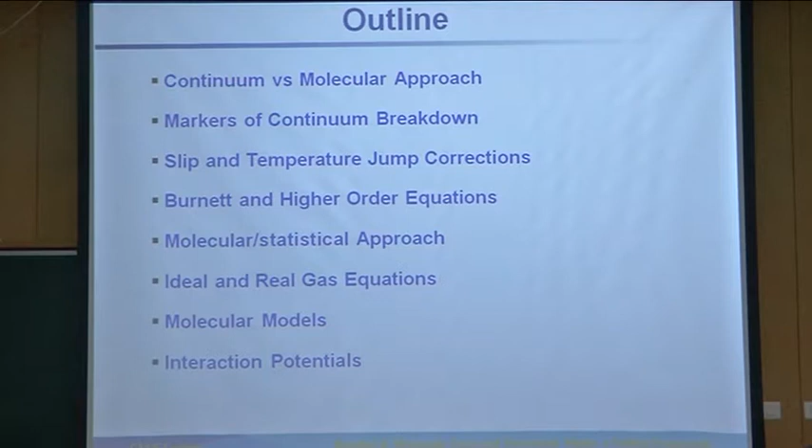As you know, a fluid can be described in two completely different ways, but still they are very complementary ways. Okay, so both methods are complementary.

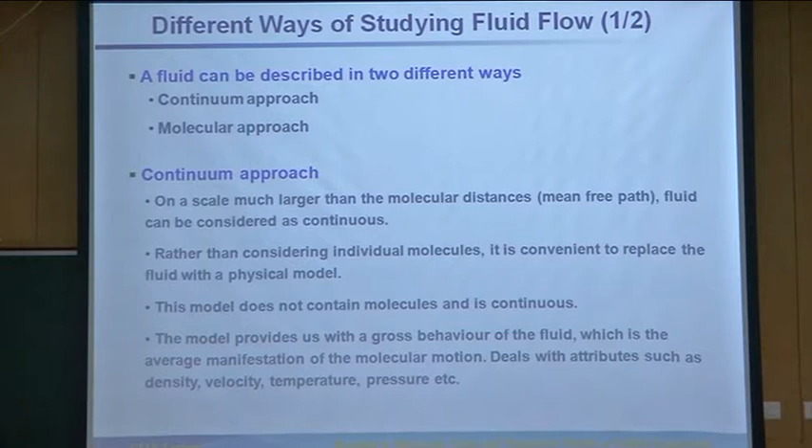When it comes to the continuum approach, the continuum hypothesis is that on a scale much larger than the molecular dimension, a fluid can be considered as a continuous medium. Of course, the reality is that gas is composed of molecules, particles, but you ignore that reality and consider it to be a continuous medium. You have a model for governing the variation of certain properties ascribed to this medium, such as pressure, temperature, velocities. You have a model that gives the spatio-temporal variation of these quantities, and these models are nothing but continuum models. One of those is the Navier-Stokes equation, based on the conservation of mass, momentum and energy, as told by Professor Myong.

On the other hand, the molecular approach is where you consider that fluid or gas is essentially made up of molecules. These molecules randomly move, and in doing so, they transfer mass, momentum and energy from one place to the other. Therefore, their behavior is governed by the laws of dynamics or kinetic theory.

When you consider these molecules, the number per unit volume is so large that you cannot practically deal with each and every molecule and its dynamics, meaning collisions with other molecules. So what you do is a statistical description of gas flows, meaning how many molecules possess this much velocity. This means you start talking in terms of the distribution function, the velocity distribution function, which is a fraction of molecules belonging to a particular velocity or energy level. Therefore the governing equation is the Boltzmann equation or a simplified model kinetic equation, one of those being the BGK equation.

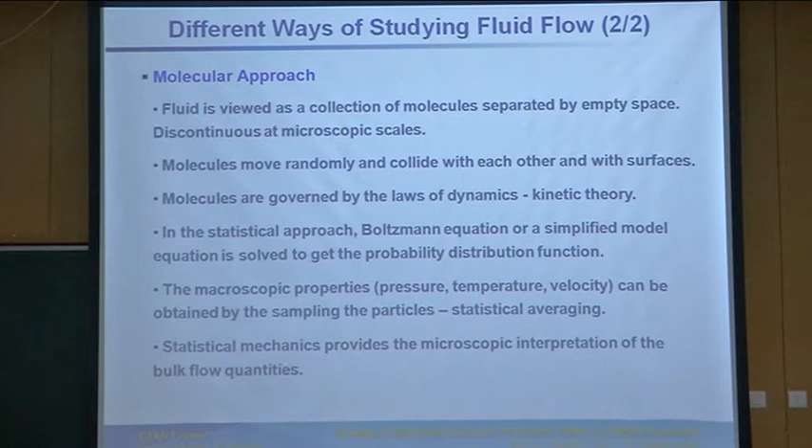But finally you have to come from the microscopic to the macroscopic picture, because you are interested in macroscopic properties, since you are measuring macroscopic properties. So you want to get back the macroscopic properties from the microscopic data. Either you sample the particles, or, as told by Professor Myong, from the statistical description you integrate those over the velocity space and you will get the macroscopic properties. Statistical mechanics provides the link between the microscopic description and the macroscopic description.

Having understood the two different ways of looking at fluid flow, there should be different methods of analyzing fluid flows. In fluid dynamics, we can have three different categories of methods. The first is the macroscopic method, based on the conservation laws. Here we talk in terms of Navier-Stokes equation based CFD, wherein you need the constitutive relations or constitutive laws—we'll talk about those in this course at a much deeper level. The length scale associated with the macroscopic method is of the order of 1 centimeter to 1 meter.

Then we consider the microscopic method, the bottom one. This is kind of a misnomer, because here the length scale isn't really in microns—it's actually in nanometers or angstroms. The method most popular here is molecular dynamics, an atomistic method wherein you consider the motion of molecules in physical space, and you integrate the equation of motion, the Newtonian equation of motion. That's how you get the overall description of the fluid flow when you integrate that picture.

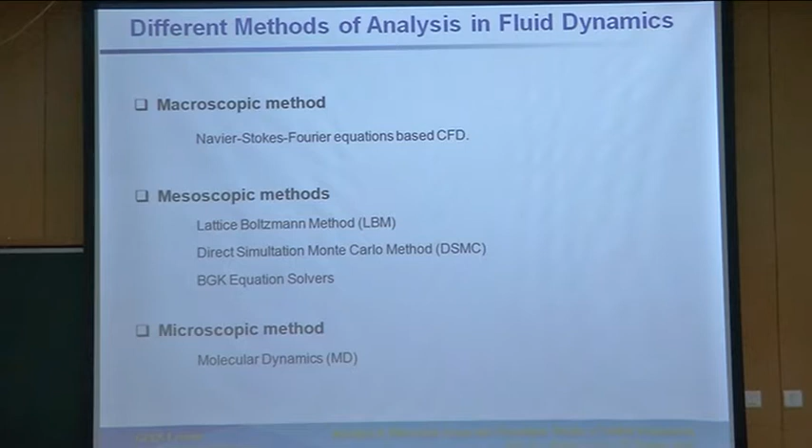Now, when it comes to the continuum versus the microscopic or molecular description of fluid flows, it's important to understand the continuum limit, and when and how we should use which model. So suppose you take the continuum model, the Navier-Stokes equation for example, you should be aware to what extent you can afford to use this equation, because it's a model with a finite range of applicability. As Professor Myong was telling, when it comes to continuum models, we deal with fluid particles. These fluid particles are in reality composed of molecules, but in the continuum model you do not consider this.

But if you consider a fluid particle, it must be composed of a large number of molecules, so that the statistical averaging would work.

If you compare this picture with this one, this red box, which consists of a few molecules, of course it's a representative picture. Consider that you have a very small fluid particle, so that the number of molecules in this fluid particle is very small. So would you be able to do the statistical averaging? No, right? Because it would fail beyond a certain extent, as you will not be able to capture the signal, and the statistical fluctuations will be so large.

So now, under what conditions could statistical averaging fail? Primarily, suppose you have a very small length scale, for example your characteristic length scale is very small. You are dealing with microfluidics or nanofluidics, with micro or nano channels. So at the nano length scale, you'll have very few molecules, and your statistical averaging may not be really right.

Another condition is as you go higher up in altitude, beyond a certain altitude the number of molecules per unit volume is so low that again the statistical averaging would start failing. So there are two scenarios in which we have to think of looking beyond the continuum description of fluid flows, or making corrections to the continuum model.

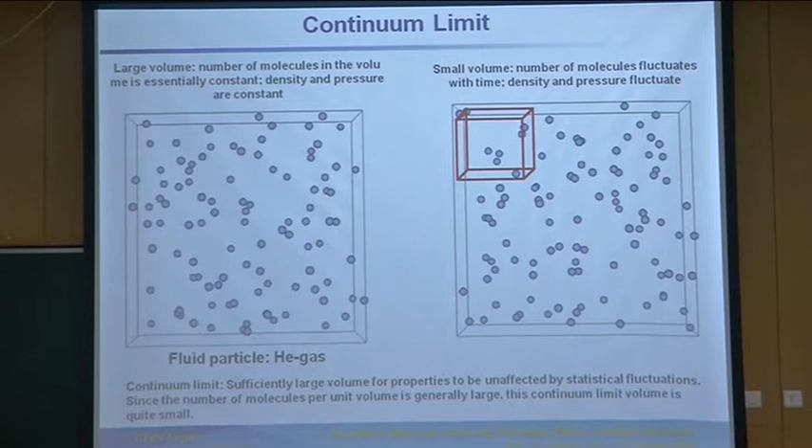Now viscosity is an interesting property. It's a transport property, which, of course, for a fluid, you know a fluid deforms under any amount of shear stress, but it presents resistance to being deformed. This viscosity is a property that represents the magnitude of a fluid's resistance to the deformation rate. Essentially it's a transport property associated with momentum transfer.

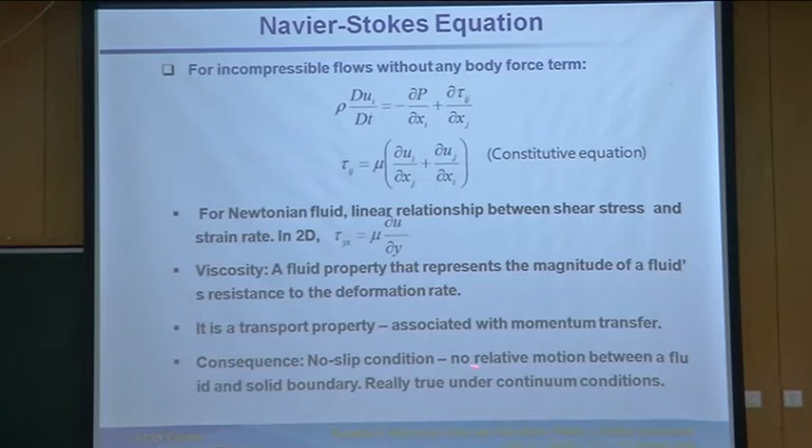And one consequence of this property is the no-slip condition that we have been using in CFD quite a bit, which means there is no relative motion between a fluid and a solid boundary. Whether this is really true under all conditions?

No, it's not. If you look at the dynamic viscosity more closely from the microscopic perspective, and use the basic laws of statistical mechanics, you consider the molecular picture: the molecules in the fluid domain and the random motion of molecules from one region to another. Due to this random motion, momentum gets transferred in the direction of the flow, from the higher velocity region to the lower velocity region.

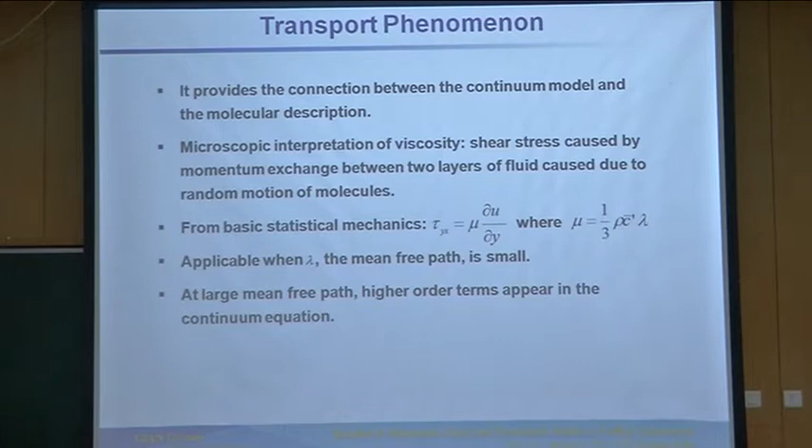That's how you get the same relationship between shear stress and strain rate from basic statistical mechanics. If you apply this, you'll find that mu, the dynamic viscosity, is defined as one-third rho times c-bar, where c-bar is the mean thermal speed, equal to the square root of 8RT over pi, where R is the specific gas constant.

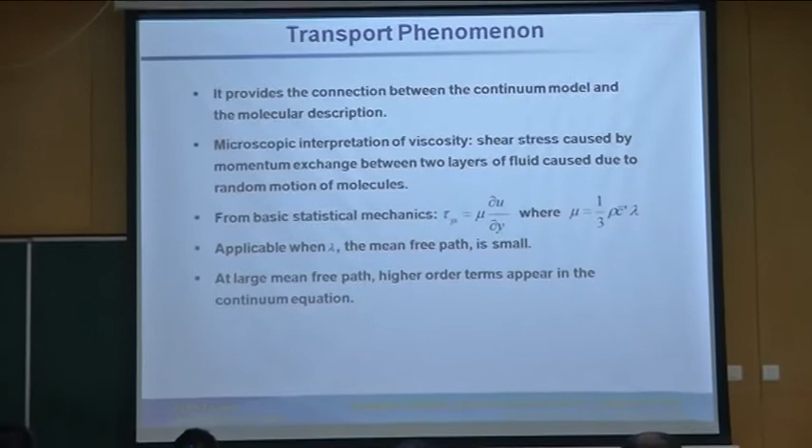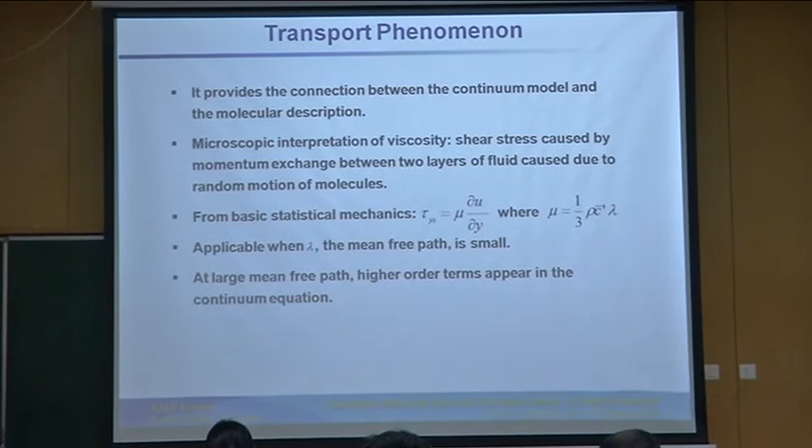If we look in more detail, this expression is only true when the mean free path is very small. The mean free path is the average distance between two successive collisions of a molecule. If it is large, this expression is no longer valid, and you get higher order terms, making the relationship between shear stress and strain rate more complicated. So at large mean free path, or at high altitudes, these higher order terms should appear in the continuum equation, and you need to consider modifying the linear constitutive relationship.

The same is also true for viscoelastic fluids.

Now, when is the continuum hypothesis valid? This brings us to the idea behind the Knudsen number, which will be consistent with what Professor Myung said. Initially, the Knudsen number was proposed as an indicator of non-equilibrium. It is the ratio of the molecular dimension, most often the mean free path, to a characteristic length d. We'll discuss what this characteristic length scale should be, since it's not straightforward — it depends on the individual problem.

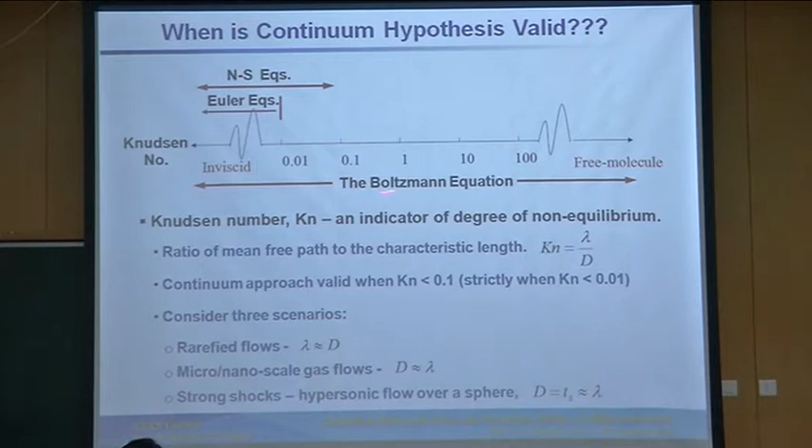Based on this, to describe the validity of the continuum hypothesis, we plot the Knudsen number on the x-axis and show the validity of different models. The Navier-Stokes equations are typically valid till a Knudsen number of about 0.1, and with velocity slip and temperature jump corrections to the boundary conditions, the model works till a Knudsen number of approximately 1. The Boltzmann equation, however, has a wide range of applicability. In fact, as we'll see later, the Navier-Stokes equations, or any macroscopic conservation equations, can be obtained from the Boltzmann equation by the method of moments.

Based on this, we could have three scenarios. One is rarefied flows, where you need to consider the Boltzmann equation, going beyond the Navier-Stokes model. In rarefied flows, the mean free path is of the order of d, the characteristic length scale, meaning the Knudsen number is large.

The second scenario is micro/nanoscale gas flows, where the characteristic length d, the global length scale, could be of the order of the mean free path — again making the Knudsen number large. The third is strong shocks, such as hypersonic flow over a sphere, where the length scale is the shock thickness. If you want to resolve the shock structure, this length scale is of the order of the mean free path, and again you need to consider the molecular description of fluid flows.

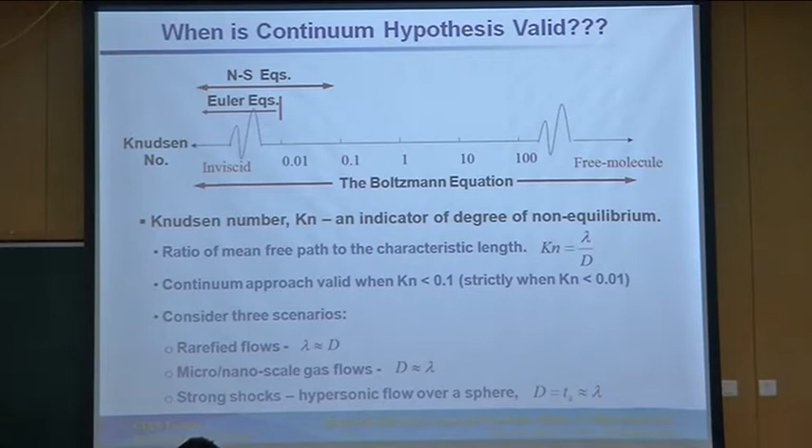Based on this, we describe the different flow regimes. As long as the Knudsen number is less than about 0.01, it's considered continuum. From 0.01 to 0.1, and a little beyond, it's slip flow. Traditionally, transitional flow is from 0.1 to 10, and beyond 10, in terms of Knudsen number, it's free molecular flow.

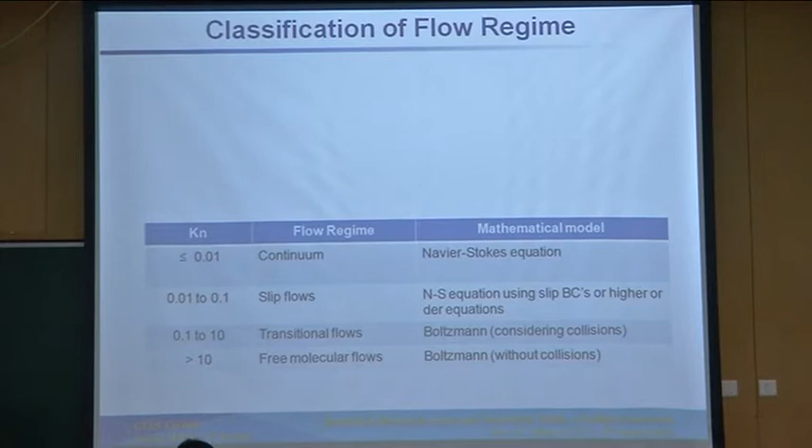Now, when it comes to slip flows, the Navier-Stokes equation can still be used, because the Knudsen number is still very low, but with corrections to your boundary conditions. So what are these corrections?

You will find that as Knudsen number gets larger, the no-slip condition on the surface is no longer valid, and you have to implement the slip condition, such that there is some finite relative motion between the gas and the surface. These corrections were first given by Maxwell.

Lambda is the mean free path, and du over dy at y0 is the velocity gradient on the surface. At ordinary conditions, your lambda is very small, less than micrometers, so the velocity slip will be very small. You can afford to neglect it.

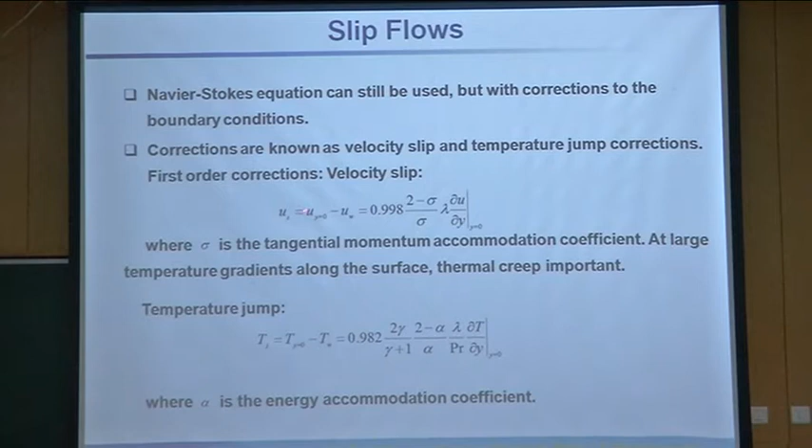But as you go to higher altitudes, your mean free path would be larger, so this term could become important, and the same has to be implemented in the boundary conditions. Using this simplified first order model, you can have second order models and so on. Professor Myong has worked on that as well, and there is something called the Langmuir slip model, which considers the adsorption of gases on the surface.

But if you consider micro and nanoscale flows, even at terrestrial conditions where you have very low lambda, you can have very high velocity gradients because of the small length scale. So this term could be effective even at micro and nanoscales, by virtue of the last term, du over dy, the velocity gradient on the surface.

Similarly, we could have a temperature jump on the surface, as the temperature of the gases may not be same as the temperature of the surface under rarefied conditions. Again, a similar expression applies, where alpha is the energy accommodation coefficient, describing how well the gas is getting accommodated with the surface in terms of energy.

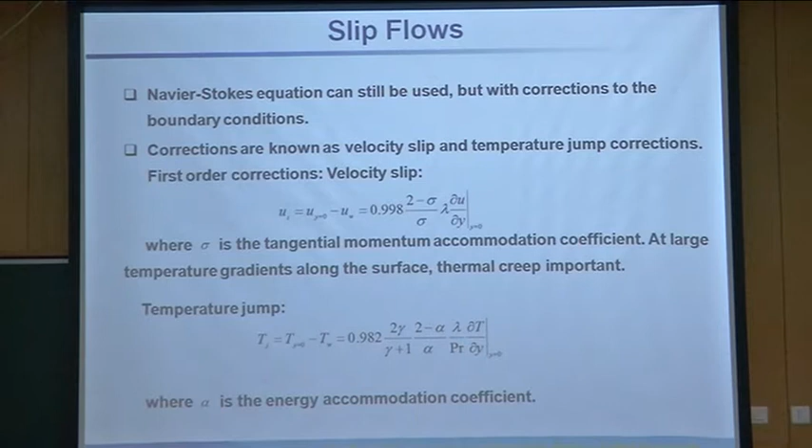Now, when you go to a little higher Knudsen number, Professor Myong was showing the Chapman-Enskog expansion, where you make corrections assuming your system is in equilibrium and then perturb it out of equilibrium. You have to consider some added terms to the distribution functions that define the equilibrium state. Depending on the number of terms you add, you can have different continuum models.

For example, if you consider second order corrections, you get the Navier-Stokes equation. The third order gives you the Burnett equation, so you could have higher order viscous and flux terms. Here I am showing the viscous term for the Burnett equation.

Interestingly, if you compare the leading term of the Burnett equation to the viscous term in the Navier-Stokes equation, the ratio is nothing but the Mach number times the Knudsen number, which is consistent with what Professor Myong has been saying: that it's not only the Knudsen number that matters, but the product of Mach number and Knudsen number which needs to be considered.

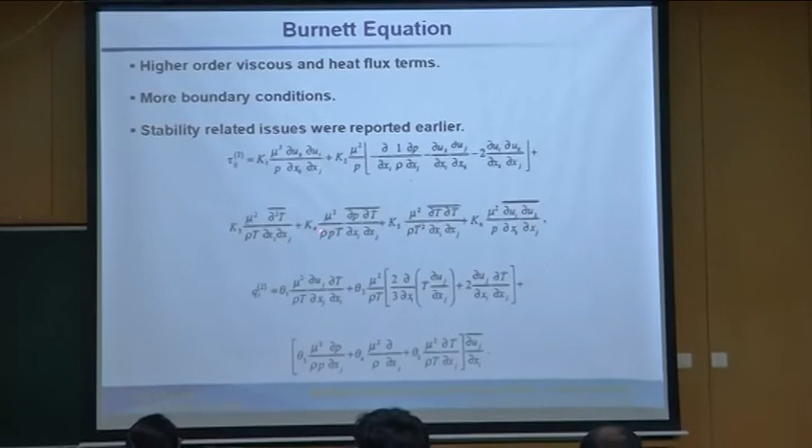The other condition in which the Burnett equation needs to be considered is when you have low speed but highly non-isothermal flows. Suppose you have large temperature gradients along the surface. In that case, these terms could be large. So then you need to consider the Burnett thermal stress.

Now, if you go further in terms of the degree of non-equilibrium, which is given in terms of Mach number times Knudsen number, the product of those, then we need to consider the molecular description of gas flows. So let us now consider the molecular description of gas flows. Let us start with the definition of a gas, and how it is different from solid and liquid.

Of course, the three states of matter can be distinguished because of the intermolecular forces, or in terms of the mean molecular spacing that exists between the molecules. So, intermolecular forces and of course the shape and the volume.

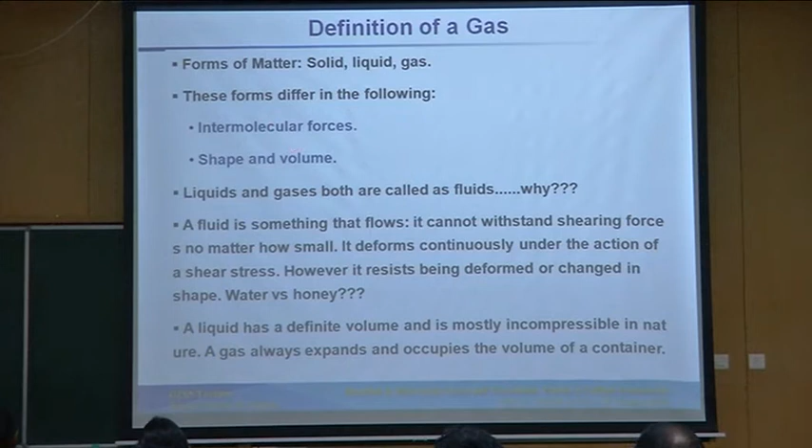Now, when you consider a gas, so typically an ideal gas, as you know from your high school physics, an ideal gas is something for which the intermolecular forces can be neglected, or molecules do not interact until and unless they collide with each other. So that is how you define an ideal gas.

Now, under what conditions is it true, and how do we consider the departure of a gas from the ideal state, and what are the effects of temperature on the model that we consider in describing a molecule or a gas. So then, what is a molecule? The molecule is something that characterizes the substance or the gas itself. It is the most basic, elementary entity that describes the properties of a gas.

Now you can have three kinds of gases. You can have monoatomic gases, diatomic gases, and polyatomic gases. Now a monoatomic species has only translational motion. It can only move in the space, in the physical space, in three independent directions, x, y, z.

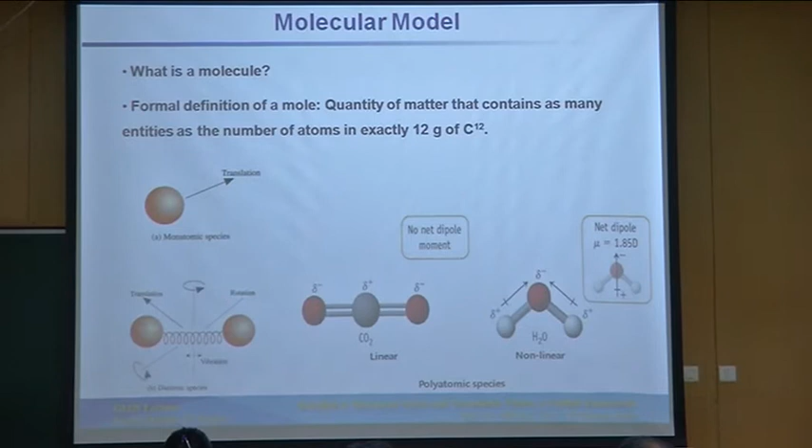When it comes to diatomic species, it can not only move, but these can also rotate about the axis. So accordingly, you will have the rotational mode becoming active when you consider diatomic gases. At the same time, if you consider this basic spring model, this molecule can also vibrate. So you will accordingly have the active vibrational mode. Same is true for polyatomic species.

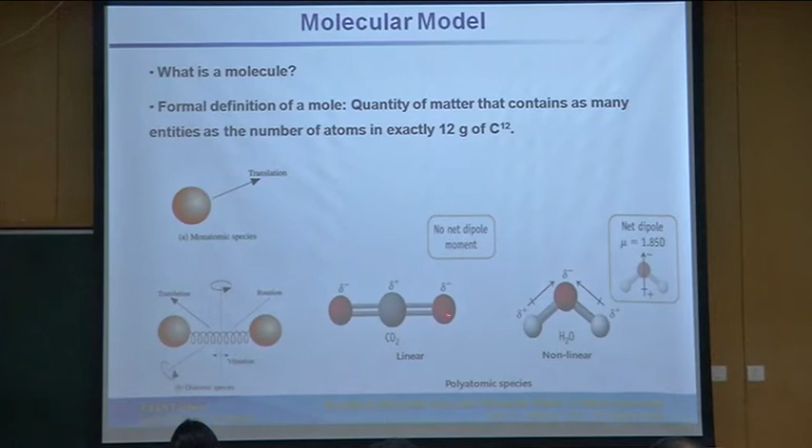You can have two different kinds of polyatomic species, linear and non-linear. Linear, for example, CO2 is a linear polyatomic molecule. Polyatomic means it should have three or more atoms. When it is linear, again, it depends how many degrees of freedom would be active for each mode. For example, translational, there could be 3 degrees of freedom active.

When it comes to rotational, for the diatomic and the linear polyatomic, you will find that there will be only 2 rotational degrees of freedom effectively. It's because the moment of inertia about this axis would be very small. Now, you will have the moment of inertia about this axis and the z axis, but the moment of inertia about this axis is very small, so ignore that degree of freedom. So effectively you have 2 rotational degrees of freedom here, whereas for non-linear you have 3 rotational degrees of freedom.

When it comes to the vibrational degrees of freedom, it becomes a little complicated because it is temperature dependent. Depending on the temperature, you can have different active vibrational degrees of freedom. At low temperature, the active vibrational degrees of freedom could be as low as 0, whereas at a temperature close to the dissociation temperature of the gas, you will have the most excited state of the vibrational mode. So it depends on the individual gas. And therefore, when we consider the molecular description of a gas, or when we develop a molecular model, these things need to be considered.

How do you describe a gas? How do you consider the basic molecule description? It all depends on the details. Here in this picture, we are completely ignoring the electronic structure.

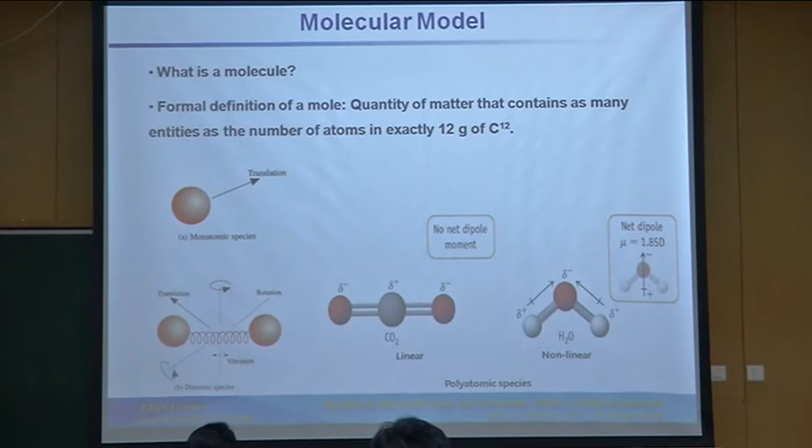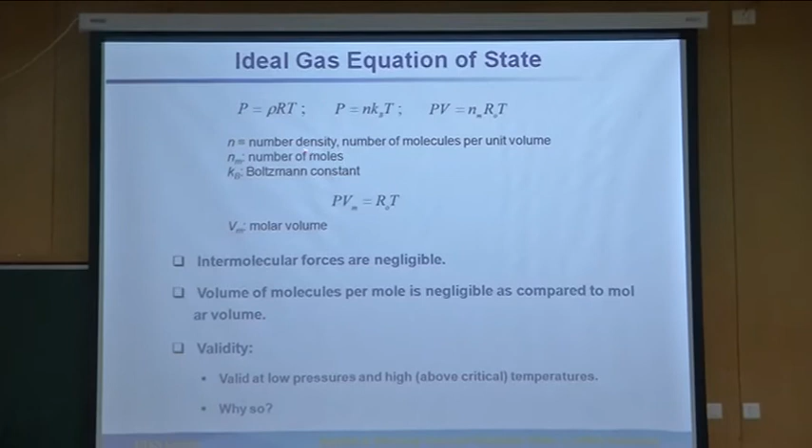Let us consider the ideal gas equation of state, given in different forms. Let us be aware of the different terms used in this course. P equals rho RT is the most known form, where rho is the density, mass density, R is the specific gas constant, T is the temperature.

It could be written in this form, N kT, where N is number density, the number of molecules per unit volume, and kB is the Boltzmann constant. You can also write the same equation in this form, where N sub M is the number of moles, and R0 is the universal gas constant.

If you bring the number of moles in the denominator on the left hand side, the form you get is PVm equals R0T, and why we are interested in this form will become clear soon, where Vm is the molar volume of the gas per unit mole.

Now, when it comes to ideal gas, we consider that the intermolecular forces are negligible. At the same time, we say that the volume of molecules per mole is negligible as compared to the molar volume - one is the macroscopic volume, and the other is the total integrated microscopic volume comprising the molecules.

But how about the validity of this equation? Whenever we use an equation, you should be concerned about its validity. The ideal gas equation of state in this form is valid at low pressures and high temperatures. Why so? Think about it a little and then come back to me. But let us remember this: valid at low pressure and high temperature.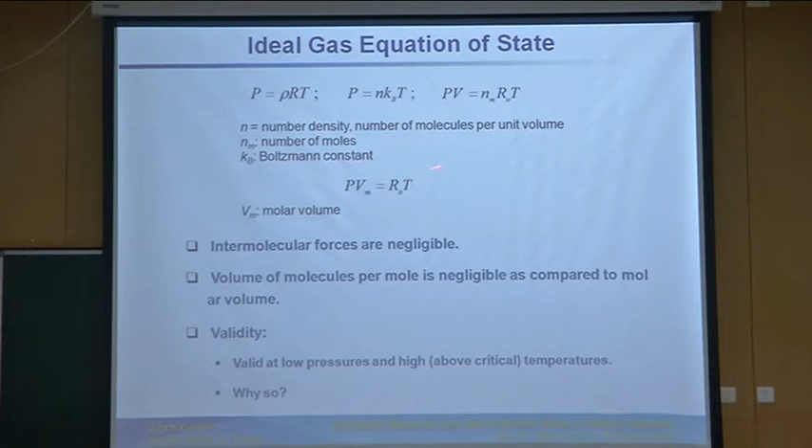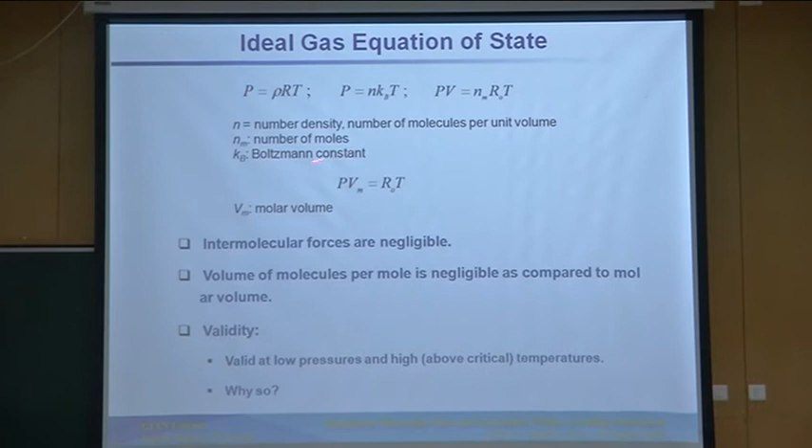So that is the idea behind real gas effects - real gas means you have the opposite conditions of high pressure and low temperature. For example, at cryogenic temperatures, you will need a different equation of state or a modification to this equation. Or when you have high pressure, the number of molecules per unit volume is so large that intermolecular forces cannot be considered negligible. Again, you need a correction for that.

So the two corrections we will consider in this lecture are the van der Waals equation of state: P plus A over Vm squared, times Vm minus B, equals R0T. That's why we use that PVm equals R0T form of the ideal gas equation. Here, A over Vm squared is the correction for the intermolecular forces significant at high pressure, and B is the correction for the finite volume of the molecules as compared to that of the gas.

Interestingly, these parameters A and B can be obtained from the critical properties of a specific gas, and you can write this equation in terms of reduced quantities, normalized by these critical properties. You then have the universal van der Waals equation of state, which you can apply generally. The other equation is the Virial equation, given by this, wherein you write PVm over R0T.

The left hand side is also known as the compressibility factor, which is written in terms of this kind of expansion, expansion in terms of the molar volume. A1 and A2 are the coefficients which are known as the virial coefficients. Vm is the molar volume.

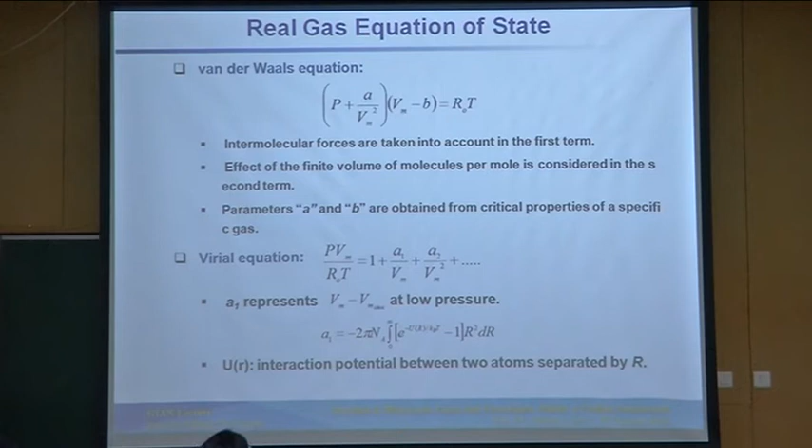So therefore, let us now consider this interaction potential, how molecules do interact with each other. Of course, you can have many more equations of state, but here we are considering only two.

So having understood that, we started with the assumption that beyond some point, when some conditions are violated, we need to consider the molecular description of gas flows. In the molecular description, you need to construct the molecular model, how good or bad you can design it, because you have limited computational capabilities. So you need to know the computational capabilities you have, and accordingly consider an appropriate molecular model. After choosing the molecular model, you need to consider how these molecules are going to interact with each other. This is very important in the molecular description of fluids or gas flows.

Herein, let us consider one popular interaction potential. It's a model potential. Why model? Because the way two molecules interact with each other is truly very complicated, it could be highly complicated. And how can you describe the true interaction between two molecules? This is again a very complicated subject.

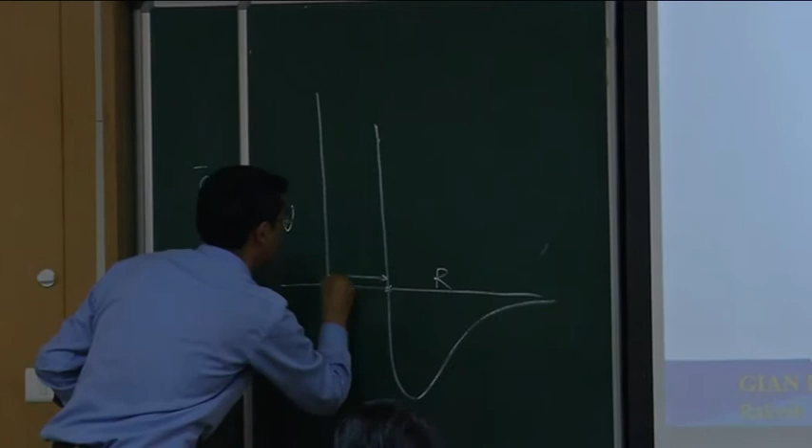Now this distance, or this location, is very important, where you are getting the interaction potential at zero. I forgot to show here—this is your U and this is your R, so the behavior is something like this.

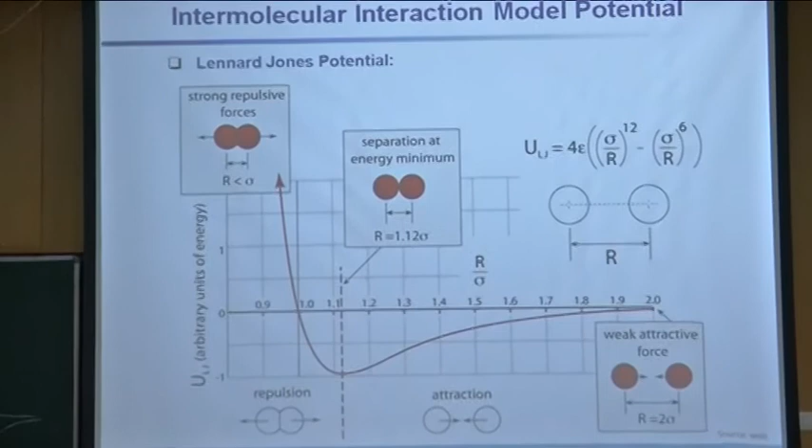This location, this distance, is nothing but sigma. The importance of sigma is that it's a very important parameter because it represents the length scale at which the interaction between the molecules becomes very significant—they start repelling each other strongly, as you see here it goes repulsive. There is a very strong force in repulsion, so molecules are strongly repelled at this length scale. So this is a very important length scale.

In fact, you can use it to describe the diameter of a molecule, because there is a length scale at which the molecules really start repelling each other and the two molecules would simply go away. So it can be used to describe the diameter of a molecule, because otherwise it's easy to say the diameter of a molecule is 3 angstrom, but if you really think about it, it's very difficult to define the diameter of a molecule. So this is one such measure which defines that.

Now, yeah. What was that? The significance of positive and negative value.

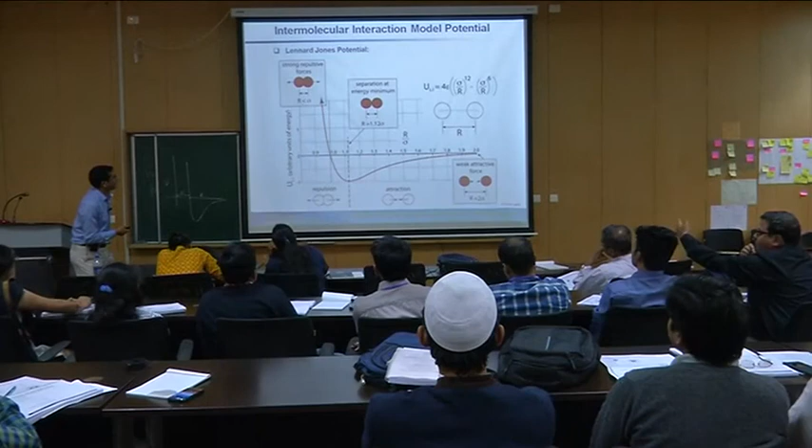You have this attraction force, and then the repulsion starts. But this is the net effect of that—you have the attraction and the repulsion. Beyond this, it's the repulsive part which becomes prominent, because of this relationship.

The second term on the right hand side gives the attraction, and the first term on the right hand side gives the repulsion. So accordingly the combination would give you a value. I forgot to mention this: sigma over r to the power 6 is the attraction term, and sigma over r to the power 12 is the repulsion term.

Interestingly, why it is sigma over r to the power 12 is that it has been chosen such that it approximates this behavior really well. At the same time, you can save computational time, because sigma over r to the power 12 is nothing but the square of the right hand side term, sigma over r to the power 6.

So therefore, when it comes to the molecular description of gas flows, the model that you choose is not just based on how well it can capture the physics, but also based on the limited computational resources that you have. So sometimes you have to make a trade-off between accuracy and numerical efficiency. Sometimes you would like to go for a very sophisticated, advanced model, but you do not have resources to really do the computations.

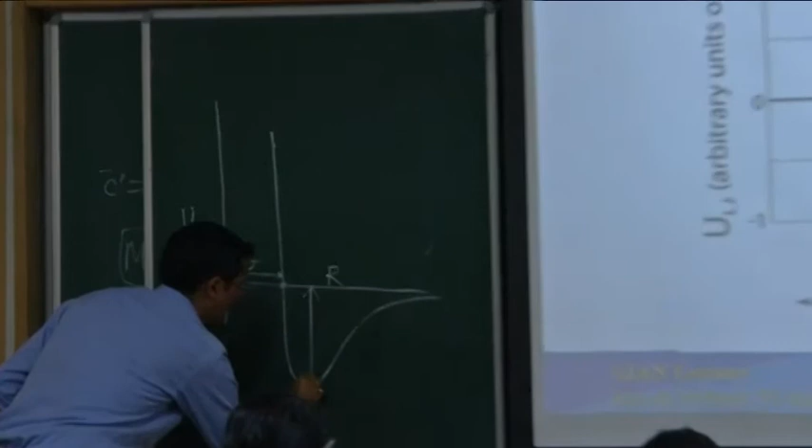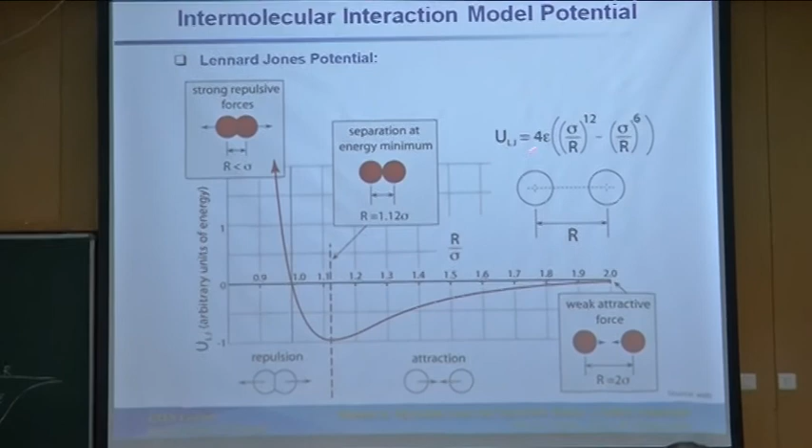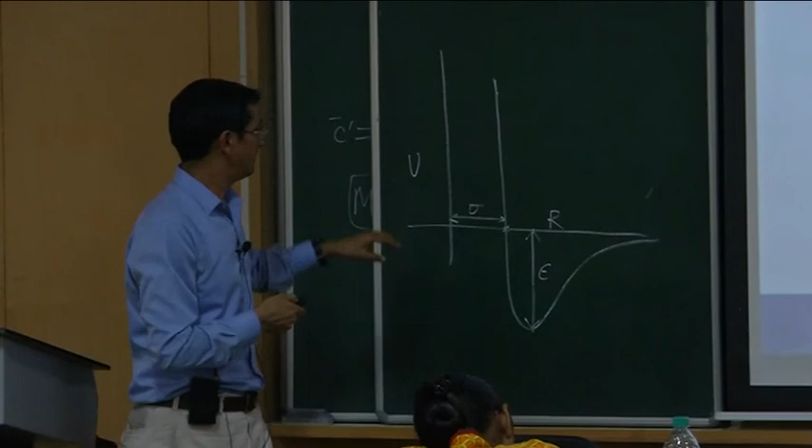Now this depth here is known as the energy well depth, and it is given by the symbol epsilon—that's how epsilon comes in here. It represents the energy well depth. Again, how well you are able to represent the interaction between the two molecules is given by these parameters, sigma and epsilon, in this particular model, the Lennard-Jones model.

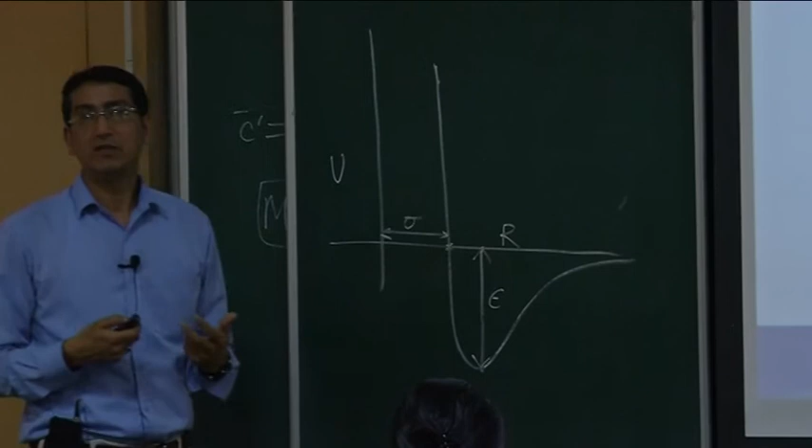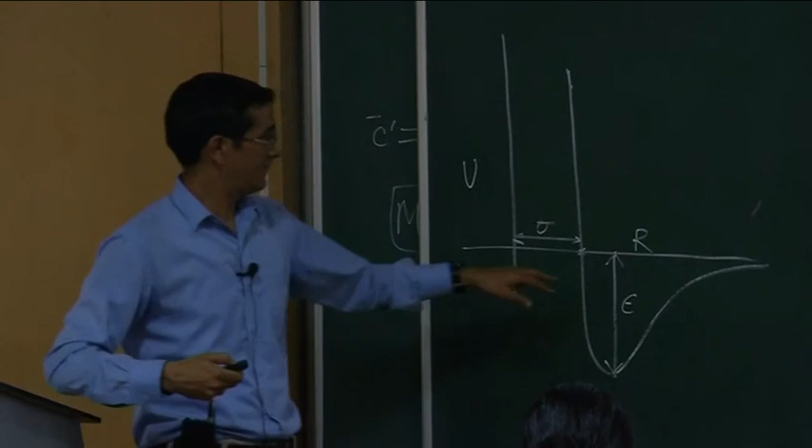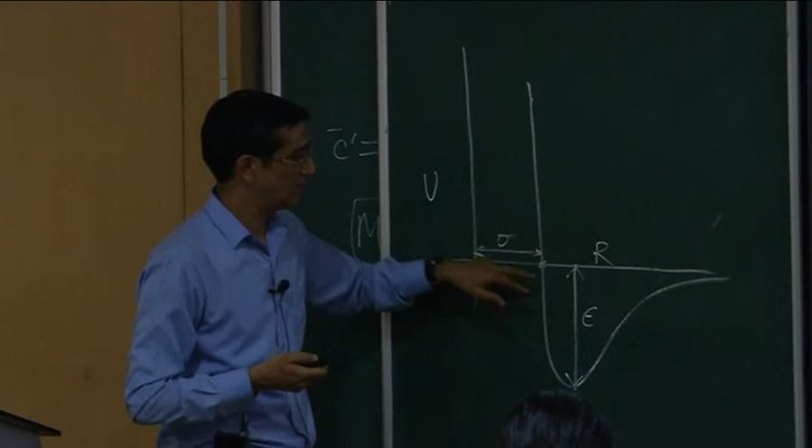Depending on the epsilon value and the sigma value, you should be able to see the qualitative behavior of different gases—whether you are able to reproduce the behavior of gas at the qualitative level and then at the quantitative level. For example, if you consider different gases like oxygen, nitrogen, and helium, whether this model can really give you the correct boiling point, it would depend on the values that you choose for sigma and epsilon in this model, the Lennard-Jones model.

Please understand that it is mentioned beyond r equals 2 sigma, or 2.5 sigma many times taken—beyond that distance, we consider that the forces between the two neutral molecules have become weak. Again, it would depend on the kind of molecules you are dealing with. If they are neutral, the forces acting between them are because of temporary dipoles, and these dipoles are transient in nature. As the molecules pass by and become distant, these temporary dipoles would go away.

But again, if you have a polar molecule interacting with a neutral gas molecule, or a polar molecule interacting with another polar molecule, then you will have a different kind of potential existing between the two molecules. So again, it would depend on the molecule to molecule how you choose this potential.

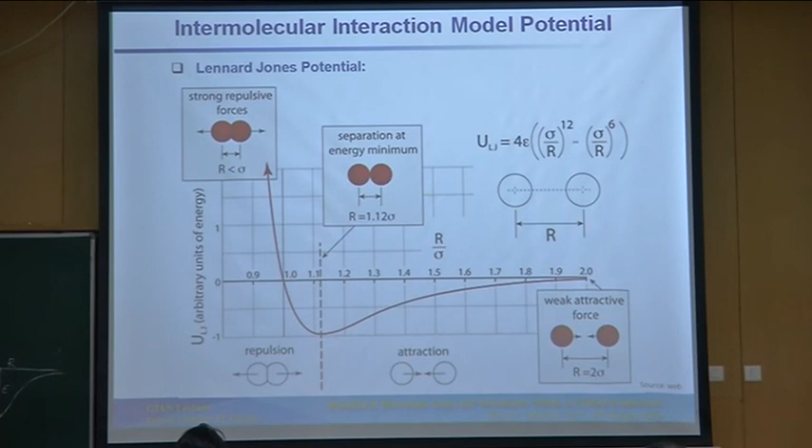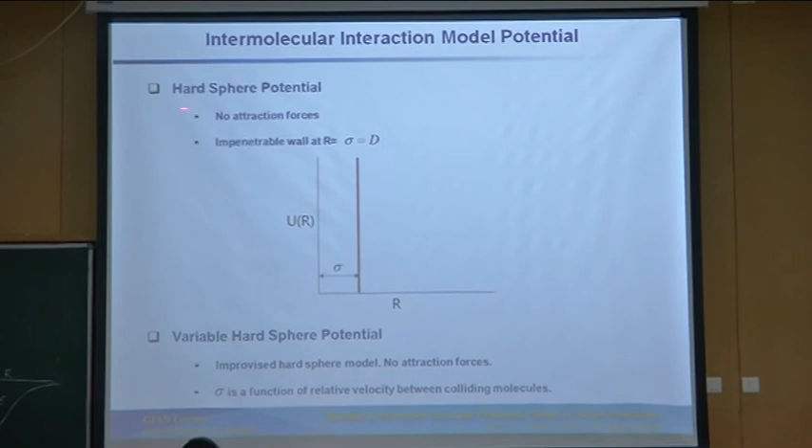Let me describe two simple potentials that we typically use in direct simulation Monte Carlo method. The first one, the simplest potential, is the hard-sphere potential, also known as billiard ball potential. It's again a model potential in which the attraction forces are completely ignored.

The two molecules approach each other and interact only when they physically touch. When they do so, they completely repel each other. They cannot cause any deformation because the forces between the two molecules are so large that they immediately bounce off each other. That's the idea behind the hard-sphere potential, an impenetrable wall at the junction of the two molecules.

So it's not a soft sphere potential, please understand. That is why it is called a hard sphere potential. When you consider a soft sphere potential, which you need for example if dealing with grains or sand, you also need to consider the deformation of the molecules. Here it is hard sphere, or billiard ball.

Now why do you choose a potential as simple as this, in which molecules do not interact until they really collide, at which point they simply bounce off each other? It's again guided primarily by computational resources. You want to save resources, but still, from numerical experiments, you have to do verification of the model and then validation with respect to experimental data, to check whether it reproduces the qualitative behavior and then the quantitative.

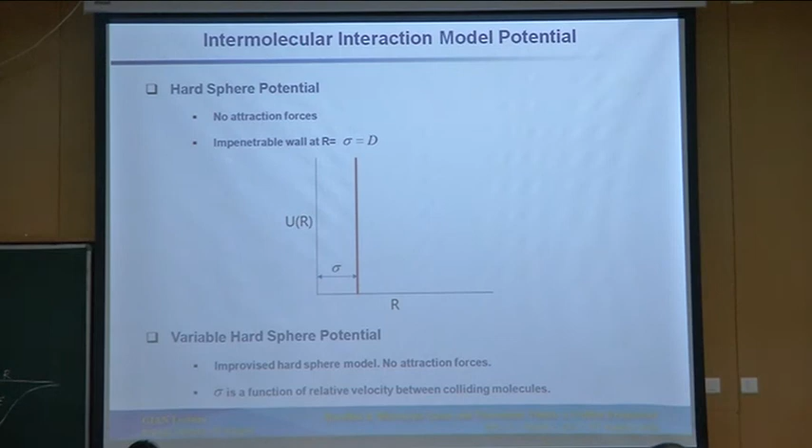Okay, let me end my lecture with this. In the next lecture, we will go beyond the interaction between molecules, and then we shall consider the Boltzmann equation, and get to the DSMC method. Thank you so much.